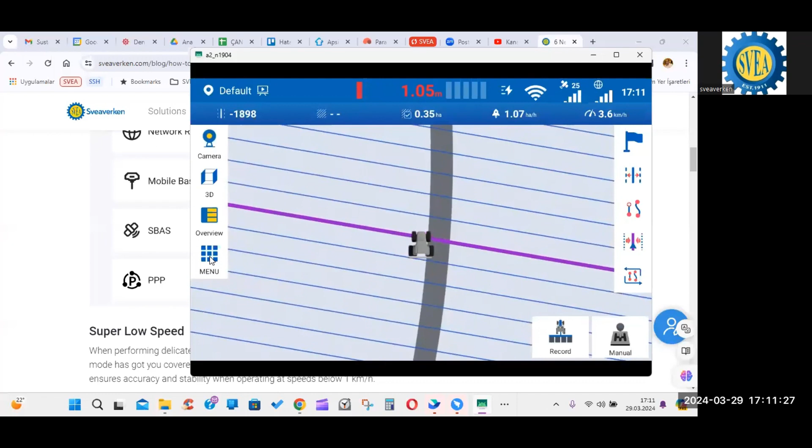And you all know where to connect. We will use the correction source. In our system, you press on the menu, device settings, and the correction source. Since my device has the L1 board, you need to have an L3 board to see the SBAS and the PPP signal. If you have that, or your customers and clients, you're going to see this direct signal.

Some countries are very sensitive to the price of RTK, and rough tasks may be done with PPP—land preparation and spraying, spreading, such kinds of tasks. Now the second one is the one we worked a lot on, actually. Now we call it the super low speed function.

With the help of this function, we can reach down to a 0.1 kilometer per hour limit. This is especially useful for planting trees or crops.

So if we would like to understand the limits under 1 kilometer per hour down to 0.1 kilometer per hour, we need to use super low speed mode. We have to activate or enable that function. Normally about 1 to 18 kilometers per hour, we call it normal mode. More than 18 kilometers, now we have a high speed mode with up to 26 kilometers per hour.

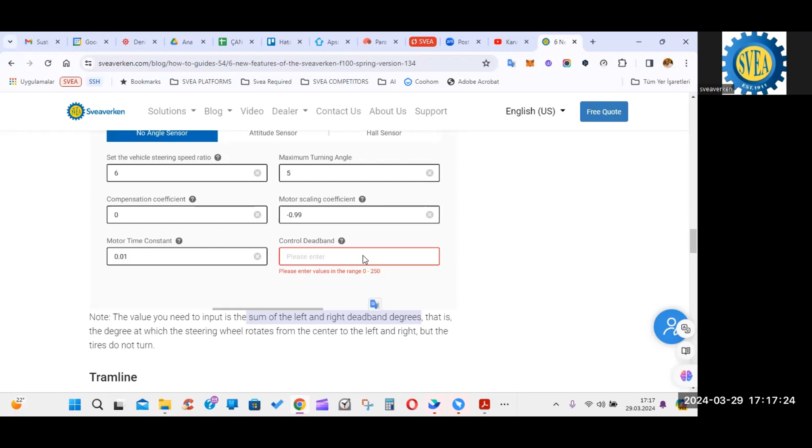Let me show you the place again. When we go to angle sensor calibration, if you choose no angle sensor, you're going to see this one here. The definition or explanation is given in this question mark icon.

No need to remember something. When you measure this, you pull the steering wheel to the left until it stops, then go to the right and measure that from left to right. Is that okay? Exactly, yes. Okay, perfect.

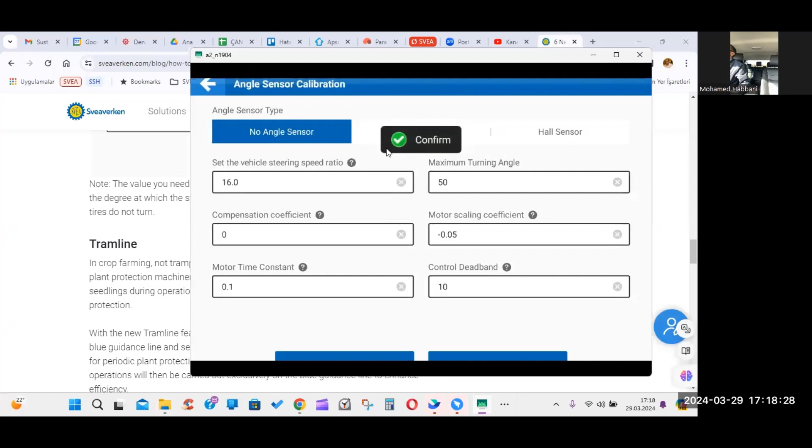You said it's only with no angle sensor. Do you mean it's automatically compensated when you use the attitude sensor? Yeah, actually from the logic, no need for this version, the attitude sensor automatically compensates itself. Since with this version, the no angle sensor mode also will satisfy our users, farmers, as I explained, no need to use angle sensor because of the calculation methodology. We have changed most things, and suddenly the accuracy is getting better and better immediately.

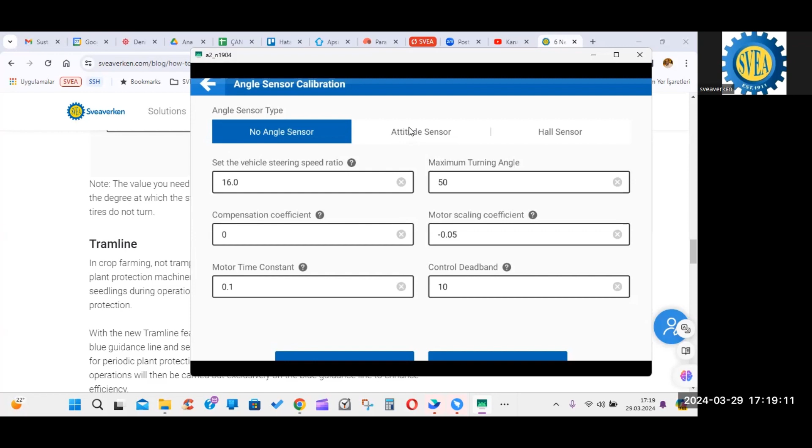So that means if you choose this one, no hesitation, the dead band issue is no longer valid here.

Because I have one on the self-propelled slurry applicator, and he is not reacting quite good because of the dead point in the middle. But he is using attitude sensor. Is it the final version you mean? With the spring version or the standard version? No, the 316 version. Yeah, actually we first should upgrade that one to this one, and you'll see the difference. Okay, clear, you'll be happy.

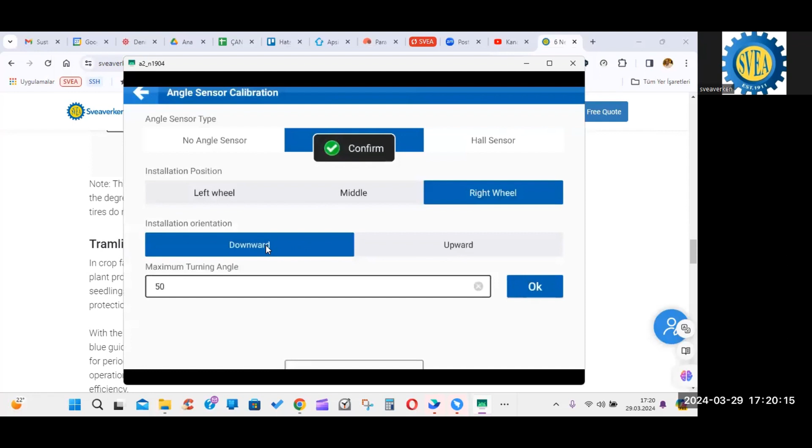I see also installation orientation. Does that mean we can put the sensor now upside down? Yes, exactly. With this one, if you put the attitude sensor from this version on, you can switch or install the angle sensor upside down or downward position too.

Good to hear such reactions, actually. So all of you needed some of these features for a long time.

Now we can come to the next feature, tramline. Especially for plant protection, for sprayers, since their booms are so wide, they need exactly the specific rows to match the seeding rows, let's say, or the guidance lines. So here we have a very flexible feature now. We can set the tramline function depending on the width of the implement and giving the row number. We are going to check it together now.

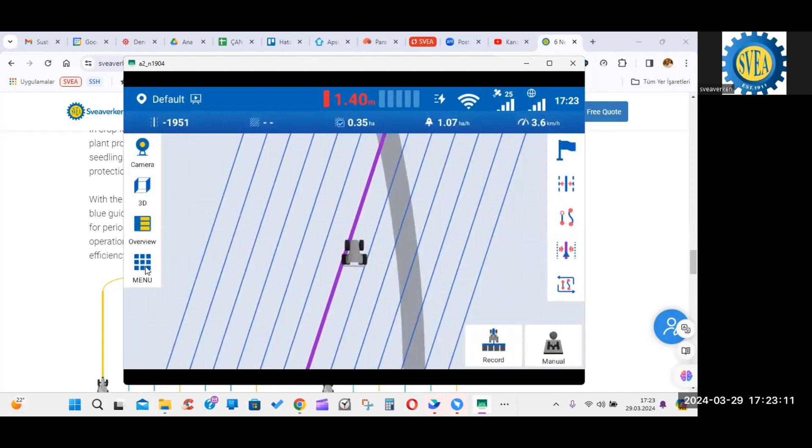Right, you can see the normal guidance line here. Whenever you create a new guidance line, there is a guidance line name, so you're going to find these lines on the field management here. So the guidance line, you see on the right-hand side on the tablet.

There is a tramline function. If you activate or turn on this function, now this guidance line can be used for tramline or sprayers, okay? So there's another explanation here.

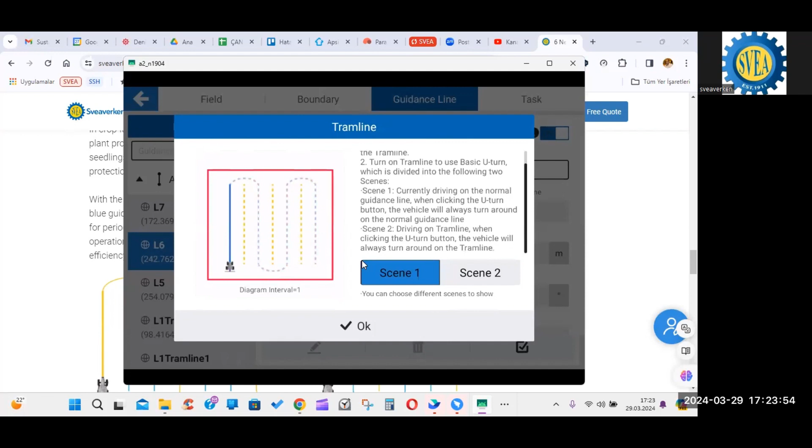For the blue line and the yellow line, they are different from each other. So if you choose one, as you see, the blue one is the normal guidance line, but the yellow one is the tram line. You can follow this one.

All right, understood. After activating the tramline function, you are going to see another icon on the right-hand side, just above the selection point, this one. You see?

When we press on that, it asks if we are going to use the current guidance line as a tram line, okay? But on the other hand, let me explain one more thing in the field management side.

You need to decide what is the interval. Second, third, normal guidance line, and then a tram line. The fourth one, every fourth line is a tram line, okay, here.

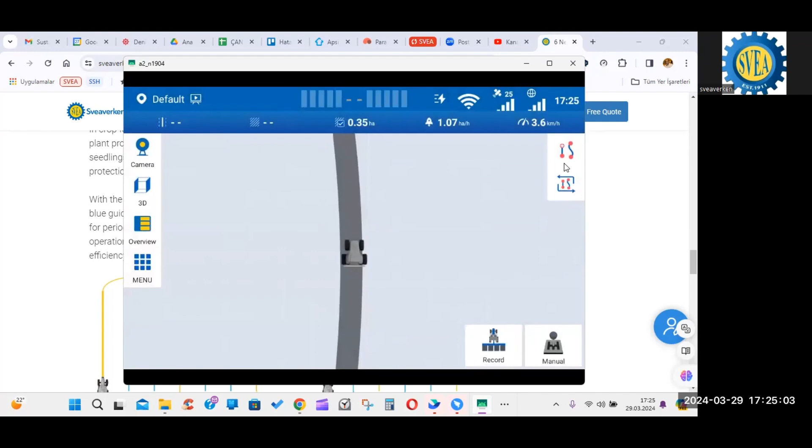When we go back to the screen again, we are going to select this one and we have the function. If this is not a tramline activated guidance line, you cannot see this icon here, okay? So here, if we choose yes or okay...

Then, as you see, every fourth line has a different color, the yellow one. That's great, really good. Very happy with it. Now let me turn my steering here.

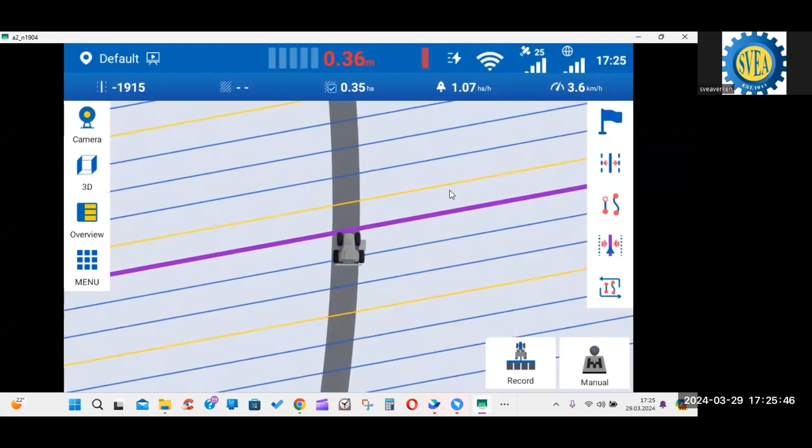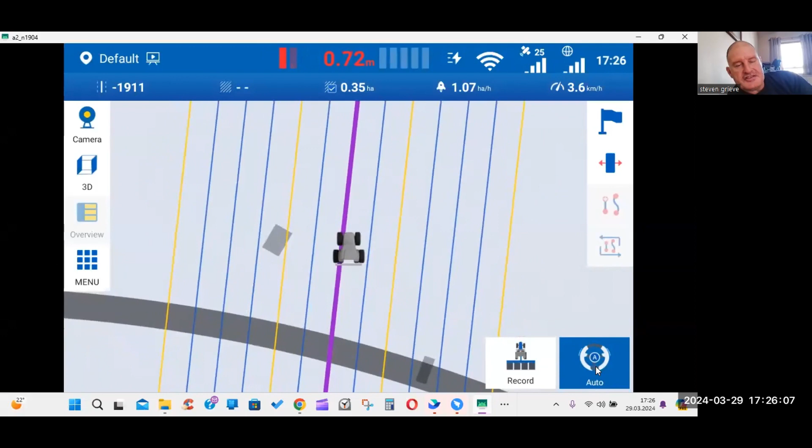So if you were going to interpret that from, say, a 3-meter setup, if you were on an 18-meter tram line, you would take every sixth one as your line. Exactly, every sixth line is the tram line. That's right. Okay, now I activated my steering wheel motor.

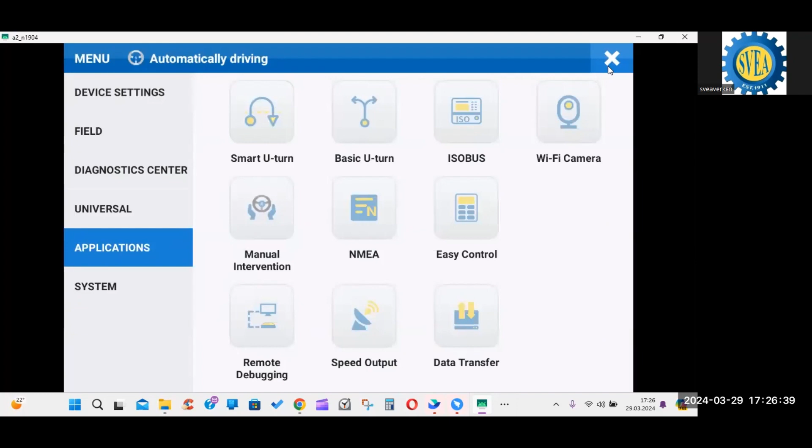Okay, of course, first of all we are going to use the basic U-turn. If we press the headland marking, flag 1 here, and I would like to, of course, I need to stop the auto mode first. It goes forward. I want to use my basic U-turn on this.

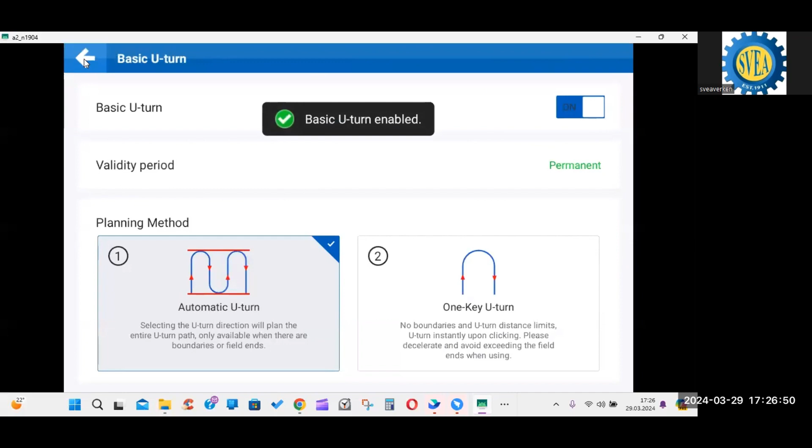That's why I'm using or activating, enabling this one. And after that, I want to put the second flag or the other one. And let me turn, hoping that it's not so close to each other, the headland marking, I mean.

Okay, so now I'm on a normal guidance line. As you see, the basic U-turn arrows appeared.

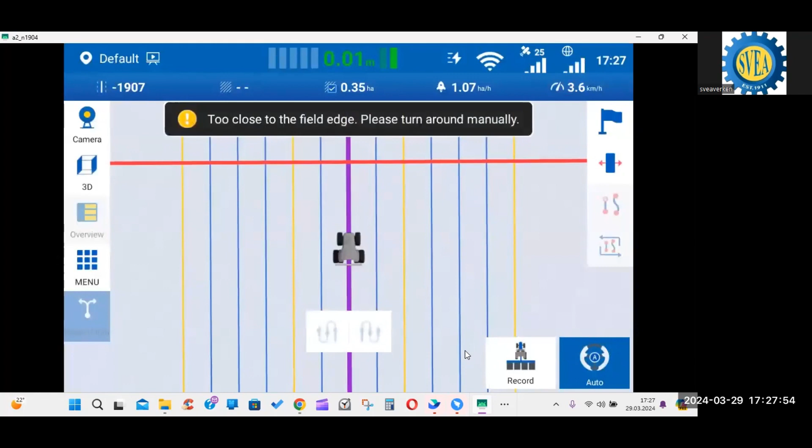Since I'm very close to the headland area, let me turn one more time. It deactivated itself because it's so close.

As you remember, it's not easy to use the demo mode for this, so immediately I'm going to show you this one. A new drawing for the turning appeared here.

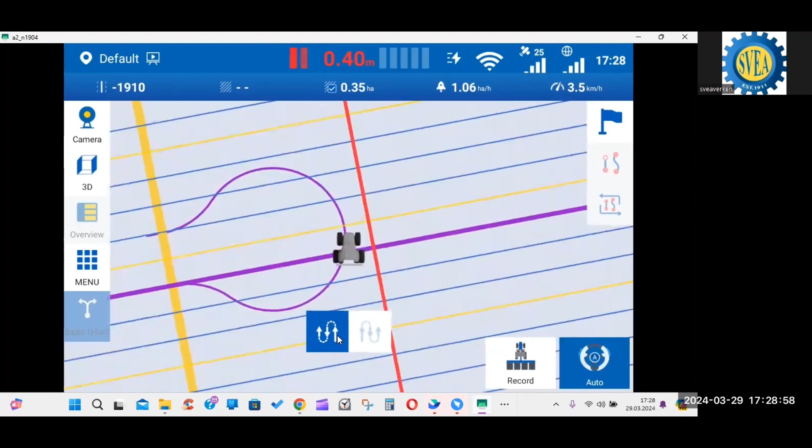But please watch carefully that the tractor will turn not on the tram line, not the next row, but the second row, if there is an adjacent tram line available.

So you would need to have a double tramline headland for that to work. You would need a double tramline headland for that to work.

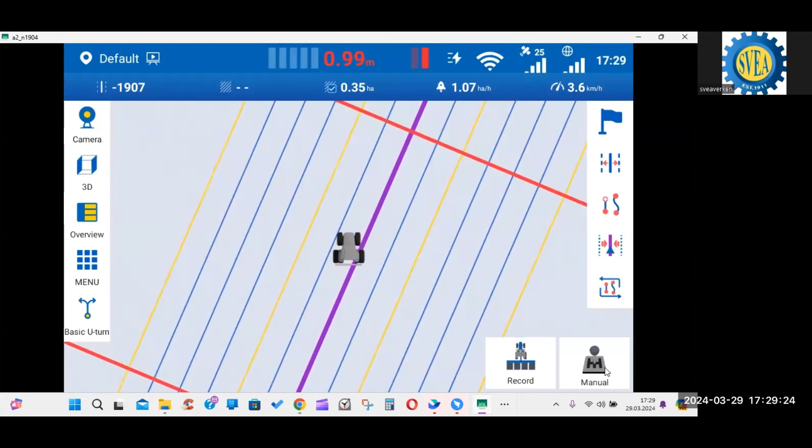So if we are, for instance, if we choose the tram line, of course we are going to turn back because the field is so close to each other, the headlands, I mean.

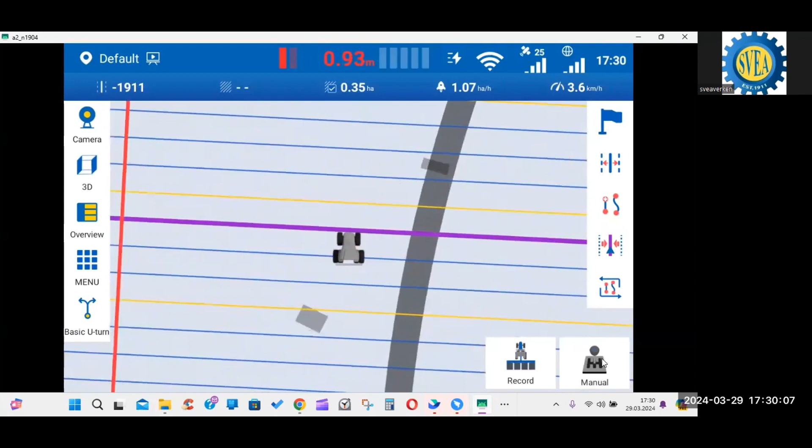So I'm going to show you how to turn on a tram line here. And the tram line is now bold and saying that it turns within 20.

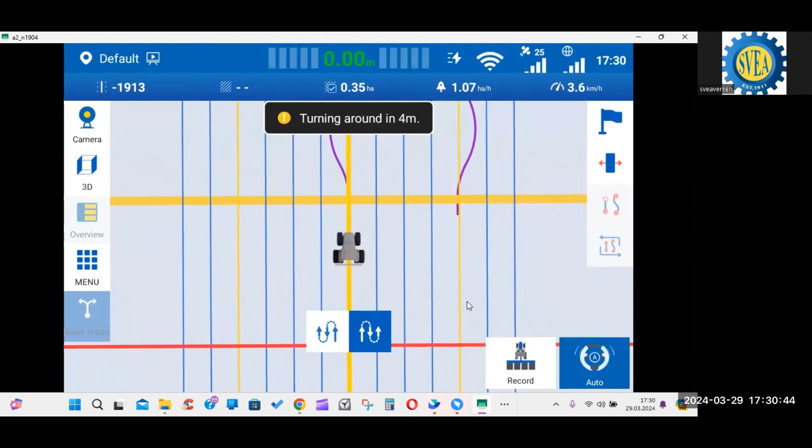As you see, the U-turn, the basic U-turn, calculated the next tram line. So that means, as a summary, we can use the basic U-turn function for tram lines too.

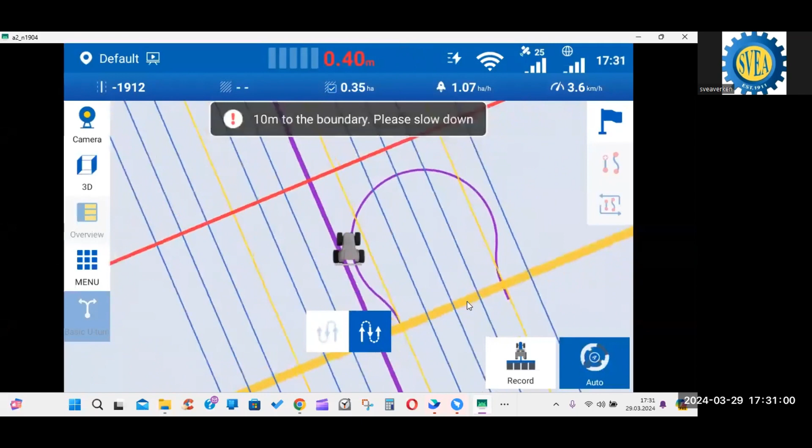As Steven said, every fourth, fifth, or sixth line, depending on your seeder width and sprayer width, when you select a guidance line, a normal one or a tram line, will define what the next turning row is.

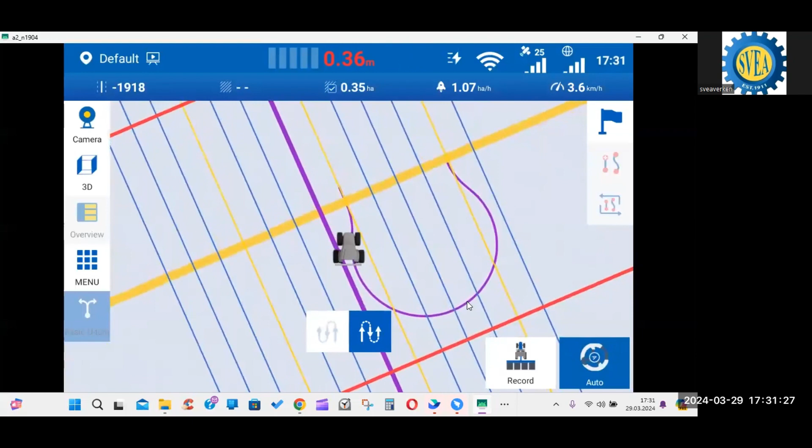Is it clear for the default tramline function now? Or do you have any questions here?

I have a question about the flags, Dinser. Was it already the field border? I thought in the past it was a line in the field. Yeah, actually, this is the headland marking, for the purpose of this one, headland marking. So if you are in basic device, not an advanced one.

Oh, so okay, yeah. So you can purchase separately the basic U-turn functionality as well. And with the help of these functions, you can set these two flags as headland marks. Between the two markings, you can use basic U-turn too. Yeah, okay, that's clear.

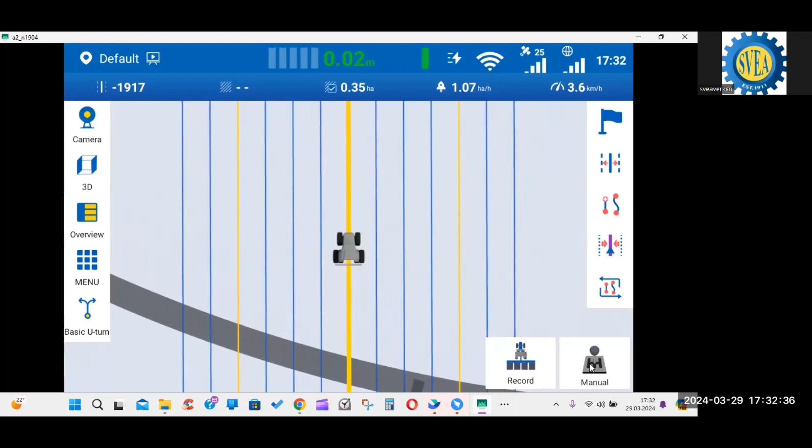Okay, if it is clear, I think we have a good new feature everybody has been waiting for. Now we will have it. Good, good. Yes, that's great.

Now, another one. Actually, these features are very trendy, or when we compare with other brands, especially premium brands like Trimble, everybody has been asking for the parallel guidance line to the border. So now in advanced mode only, because we need a border - the border function is in advanced mode only - we have the headland guidance line in this new spring version, okay?

In that way, we have two types of creating this one. Either we can create parallel to all borders, or on the right, you can see we can choose any line of the border. It really doesn't matter if it is straight or curved.

So let me show you a little bit vividly here. We are going to now activate the headland and diagonal harrowing under automatic driving settings, the bottom here. So that means these functions can be visible or invisible if you set it on or off, depending on that.

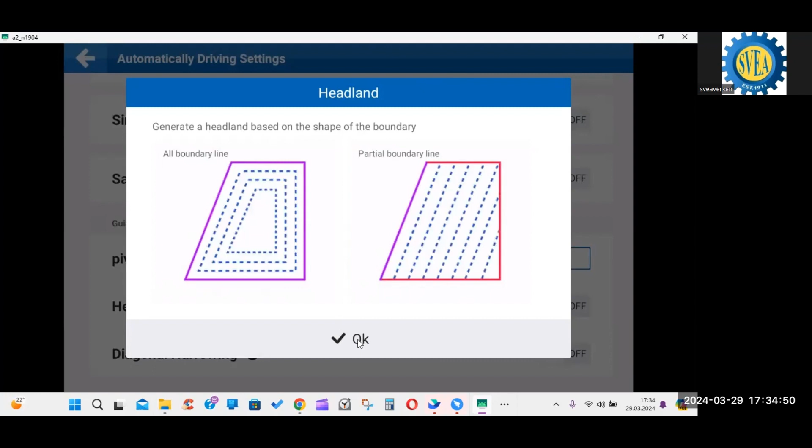So if you set it on, like diagonal harrowing, when you open these functions and features, you are going to see two new icons under the guidance line.

So this is the headland. When we press on that, the system asks us for a boundary importation, okay?

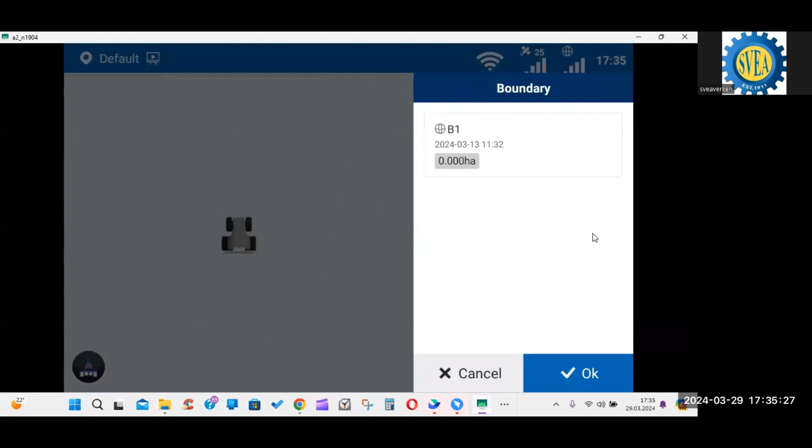Then, of course, it was somewhere else. Then it creates the guidance line, boundary lines inside that. In order to do that, it's showing us the type as it was here.

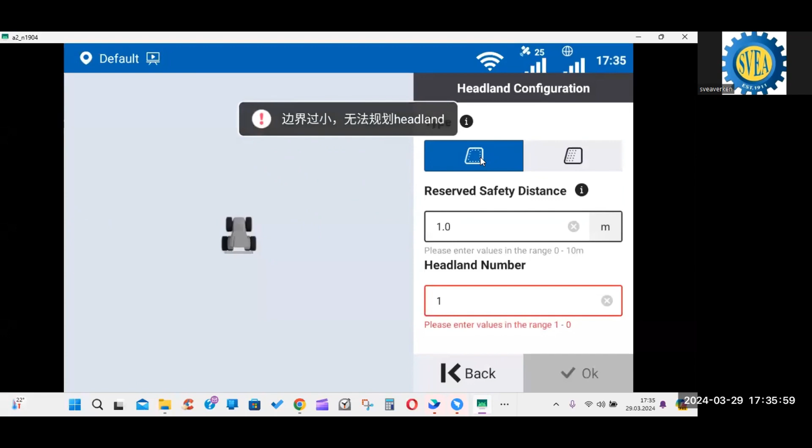Either we can choose the sides of boundaries or use the whole boundary. And the headland number is the number we would like to create. Most of the time, I think, at most 3, depending on the country again.

So there's another one, the reserved safety distance. There was such a feature, now it's more visual what it is. The red flashing area is the reserved safety distance. So you can set it 0, 5 meters, 10 meters, 1 meter, depends on you. But the range is between 0 and 10.

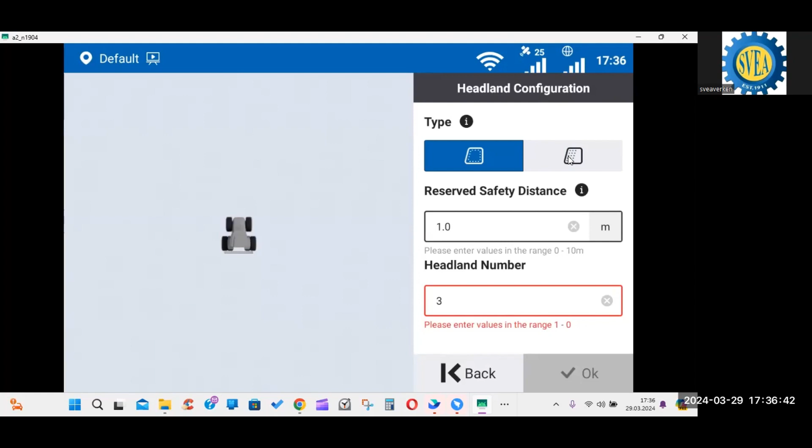So if we choose this one, it will ask us which part of the boundary will be chosen. Either we can go back or select reverse, because it's not a good drawing now. But at that moment, the parallel headland is created according to that chosen side. If we choose it, it says reselect. How is that?

Okay, how's your comment on this new function? Love it. Yeah, love it. It's great, and it's exactly what our farmers want, so that's fantastic.

Just one question to be clear for me. When you take the boundary, it means it's a boundary that you have created in the first place, right? Yes, actually you cannot see it because it's in demo. It's always moving somewhere else.

Right, it was in the past. It's not seen. Okay, yeah, sorry, visually I cannot show you because it's not real, I'm not standing still, my tractor is moving around.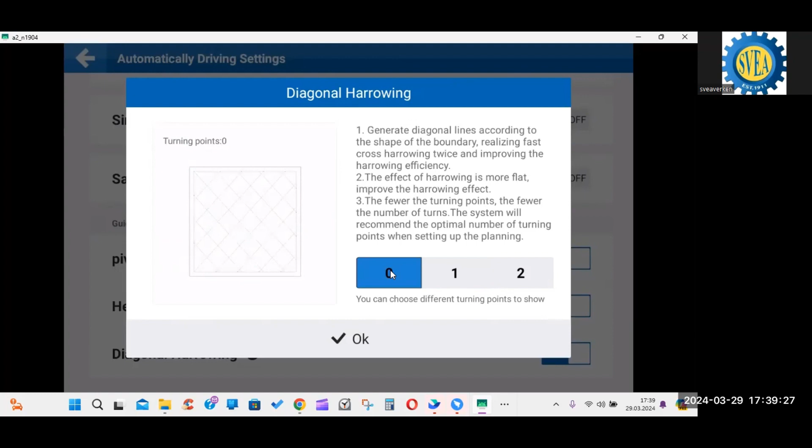The system gives us the opportunity to select between these turning points: either a shallow but narrow and long one, or a little bit bigger one, or if it's something like a square, there is no turning point, it says zero.

So when you choose this one again within a border, you have the diagonal lines, so you can turn it automatically with this function. It's not actually given in our diagonal harrowing function. Evelyn, if you can take a note, we can add it to our web page.

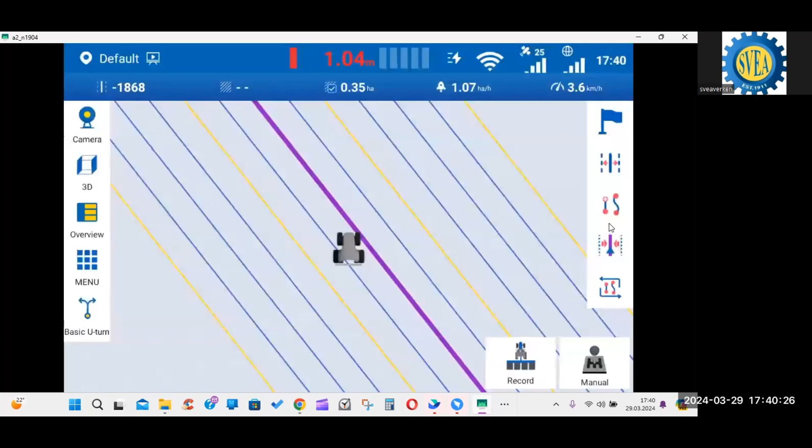If we close all these, including pivot mode, if you don't use it, no need to mess around. As you see, there is no pivot, no diagonal harrowing, or the headland guidance line icon. So in order to use it, you need to activate it. I think it's clear.

If you don't have any questions, I'm going to go to the final one, it's the isobus. For the time being, with this version, we have released the UT or VT function. That means if your implement is a comparably old one, no need to use their own specific screens, they can use our shared screen.

Let me introduce this one. Under the application menu, we have the isobus. When we activate this, first we need to open or enable the performance mode, because there is too much data transmission between implement ECUs and our screen. We have basically two functions here at the moment: the VT function is now available, and TC function needs advanced mode.

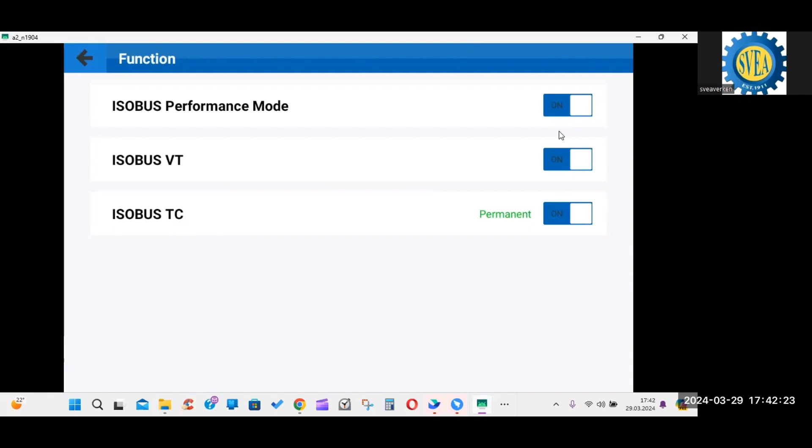But this is subject to sales, they are going to discuss how we are going to release this one. When we open or enable all of these functions, we are going to see another icon on the left-hand side under the basic U-turn icon. When we press on the isobus icon, we see a task controller section on the bottom and the virtual terminal on the top right part.

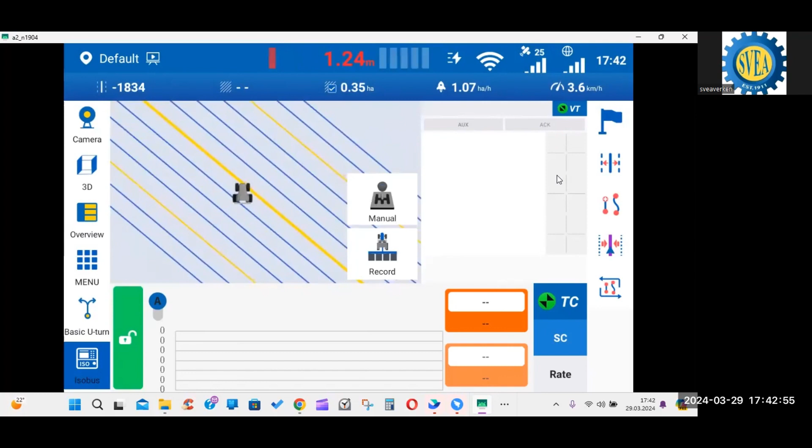When you press the zoom in, zoom out, the green and black arrow areas, one enlarges, the other shrinks. So this is the one when we connect an isobus implement here, our screen divides or splits into two. On the left-hand side, for instance, we can use such a screen and record manually. On the right-hand side, we have the virtual terminal or universal terminal.

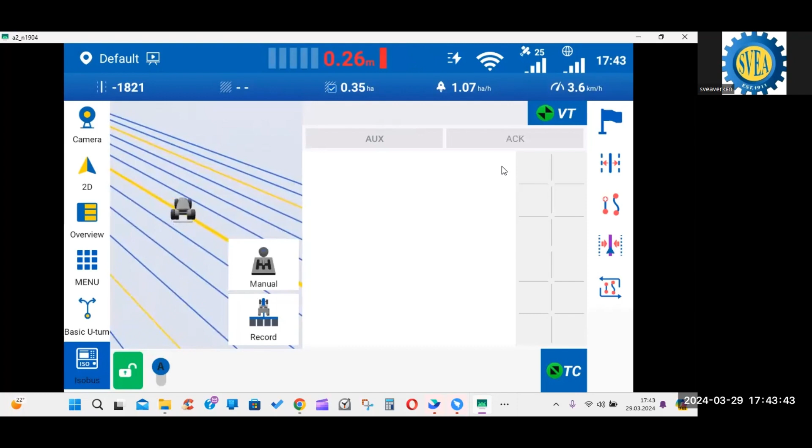Depending on the implement features, there will be a loading time. The first time loading of the implement's ECU may take longer, but after that the connection time is comparably less. We call it the object pool area, so every function of the implement will be shown here.

But at the moment, on the Android side, the communication is not the true one. That's why we have to upgrade not only the software but the firmware as well. We are going to guide you during the upgrading, so just keep in mind that firmware is also important at the moment with this version if we are going to use isobus functions.

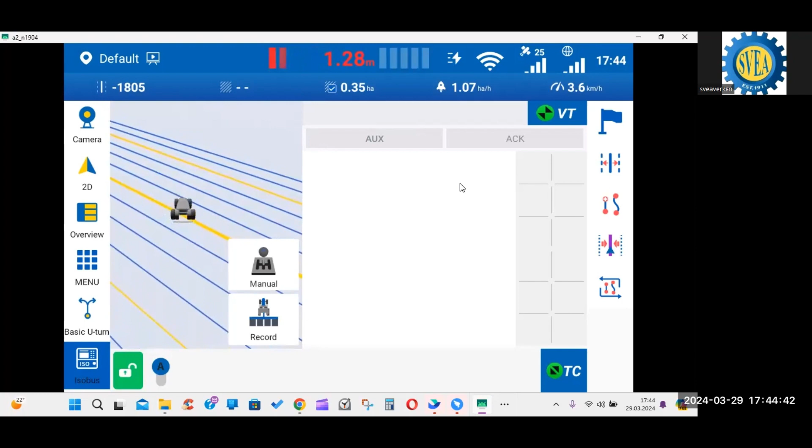I'm not going into details of the VT, but just a brief note about section control or rate control under the TC function. The section control is the automatic switching on and off of the valves. The rate control depends on the geographical location, actually, and of course section control uses that too.

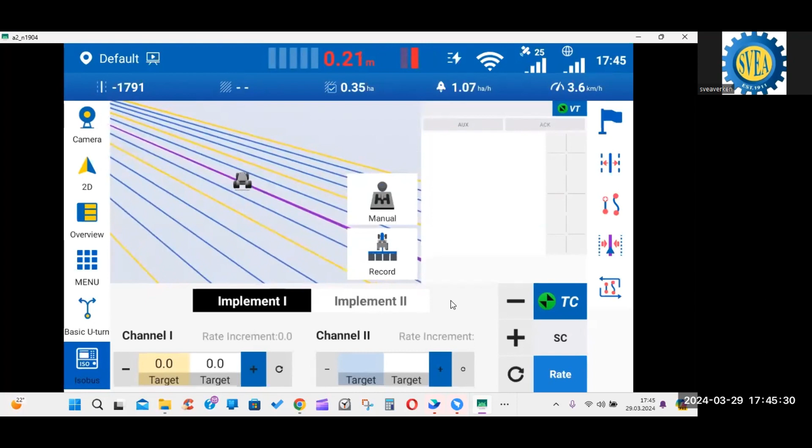On the right-hand side, there are materials on channels, and you can increase or decrease manually as well. There will even be a second implement for that, and this function can be used in manual or automatic mode. You can lock it so nothing changes, or you can open it. This is standard, just how it's shown is a little different.

What are your experiences about isobus? What have you done so far, actually? We have some ECU connection, not a problem. At the moment we are discussing the TC function mostly. Do you have any experience, Mike, have you tried that, if you are here still?

Yes, I'm here. Yes, we tried several things: one was a 12-row sugar beet seeder, the second was an Amazone spreader, and one customer is also using a Kverneland spreader. The installation was easy and works fine, but we had some problems loading the ECU the first time, it took a little longer than expected.

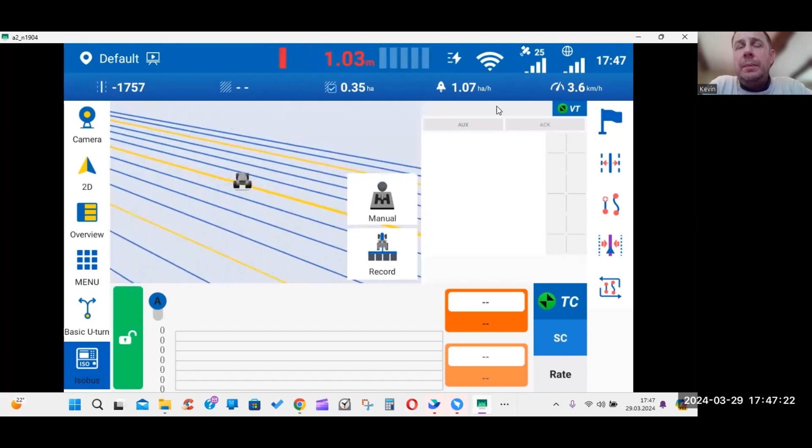Yes, we will see how it works. It's too early to say hard facts, but it's upcoming in the next weeks. You have been dealing a lot with that, and I know Kevin also tried it. We tried the TC version on the Kverneland spreader. It worked fine, except the UT was not very stable.

Since then, that's why it's in the beta. We are going to release the final version for that.

The official one, I mean. So as you know, we distributed the hardware for the ISOBUS connectivity, and now the sales team are going to distribute the second part, or batch. I think Peranen already ordered.

Has anyone not ordered yet? Any ISOBUS hardware harness? Not yet? If you don't, you may connect with the sales team, with Evelyn for instance, just to be ready before the first demand. You can add it, it's so cheap, it's a cheap product.

Do we have an AEF certification, need it or not? Actually, as you know, the sister company has already registered for the UT at the end of last year, and last week they already finished the TC function. Now, as a Sveaverken brand, we are going to start with the AEF certification.

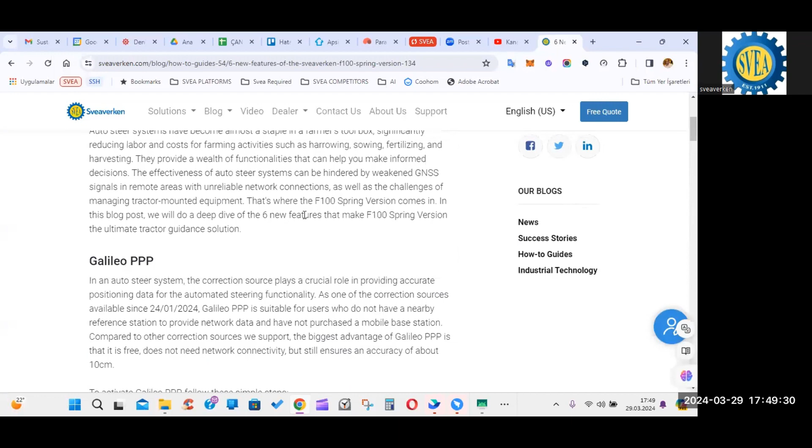But basically this ISOBUS functionality has already been approved, and we have started to use it. For the new ones, the most demanding features are those. But on the other hand, we have many more improvements, especially for the visualization and optimization issues. Here, maybe you are going to use this one also.

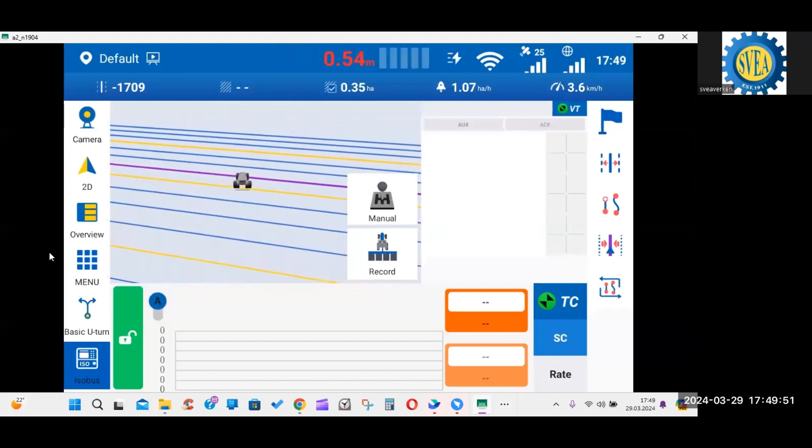Under the menu and diagnostic center, we can see the GNSS tracking map here. If you have the L3 board, I mean the SBAS PPP, you have another direct satellite signal. You can easily see how many satellites are available, used and not used on the left-right side. There are also QZSS and IRNSS which we are not using most of the time. There is one missing part, which is the SBAS augmented direct signal for SBAS and PPP here.

So we have this print, but under that you can see a list. There is a lot of sub-information, not only the one chart. Later in the real data, you are going to see what it is, and you'll have the chance to compare within time.

Sorry to interrupt. For the Galileo PPP that you described at the beginning, so it's a new source of correction that is free, if I understood well. Is there anything we need to connect on our screen to get to it? No, nothing. I cannot show you here, but it's a piece of cake. You're just going to select the Galileo. That's it.

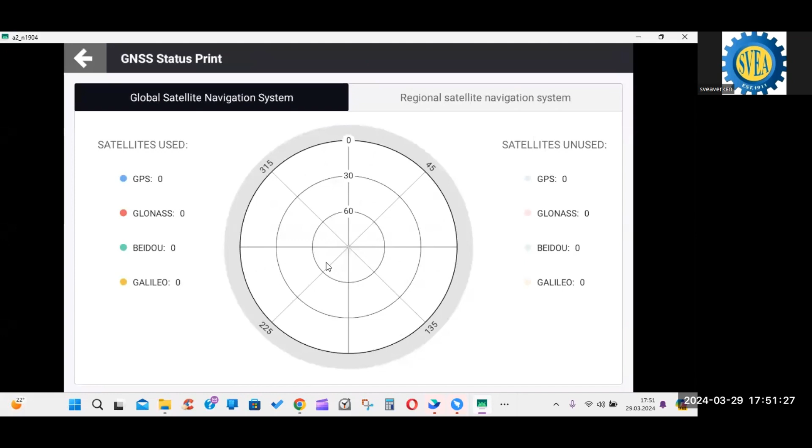It is something like this. When you go to correction source here, I'm going to show you like an RTK. You see, pressed, you'll see the Galileo PPP here. That's it, and it will not be under RTK. It will be under... of course there will be another direct, SBAS and PPP together. It will be like that actually, you see here. Excellent, it will be like this.

On the other hand, as you see, diagnostic center has been transferred to the left menu here. And we have called it common SOAP, but it's a troubleshooting manual. Up to this moment, we have been sharing the details when you have some problem. All the FAs have filled this up, and now you and the end user may directly find if there is something wrong in their systems. If it is related to SIM card detection, how to follow up the procedure, what could be the reason, and if there is something wrong with the satellite signal.

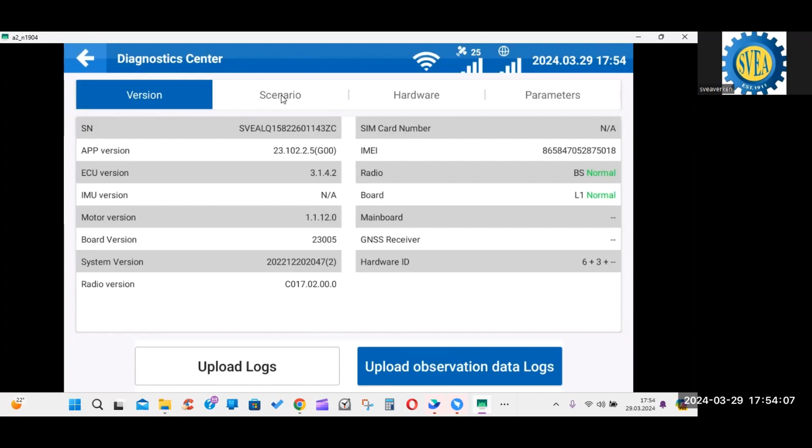What's the scenario here? As Philip asked, baseline distance can be seen here. It's not called RTK status anymore, it's called GNSS status. If it's a network RTK connection, the status is 4, since SBAS has different status numbers, and especially age of differential and the baseline distance are the ones you have to care about. Sometimes, rarely, the system may try to connect to a point more than 30 or 40 kilometers away. If the distance is far, the accuracy will decrease, so we have to check this instead of trying to guess what's wrong.

We can directly check this part, Philip.

The other day I had a customer coming from a very flat area using his tractor with a scraper to level the ground. He was asking me, like John Deere, if we could capture the elevation data and if it was accurate. I see here you have elevation—is that usable in any way or not?

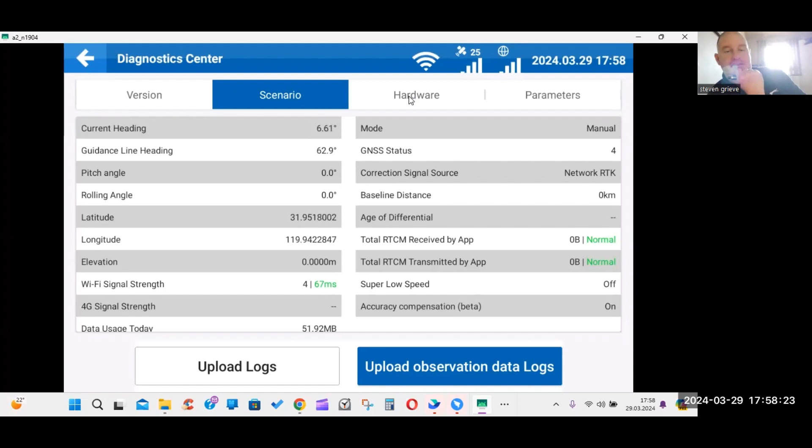Is there any other demand or requirement from other dealers in the market? Yeah, I have an old customer who has a CHC Nav with a grader, and he uses the CHC Nav height on their screen, and that works. So it might be an idea to see if they can bring that in as a usable measurement.

Any other? Well, often we get questions about the hydraulic version and how different it will be from the electric motor version. I don't know if you can say anything, or if it's too early to talk about it. Yeah, it's too early—we haven't been introduced to it yet. They're still improving the product, and there are too many different products in the market as well.

For every different brand, they've been using different types of valves. So, if it's a retrofit kit, they're going to provide us a valve to properly fit the tractor. I think they're going to introduce it in Q3. We'll discuss it later—no rush.

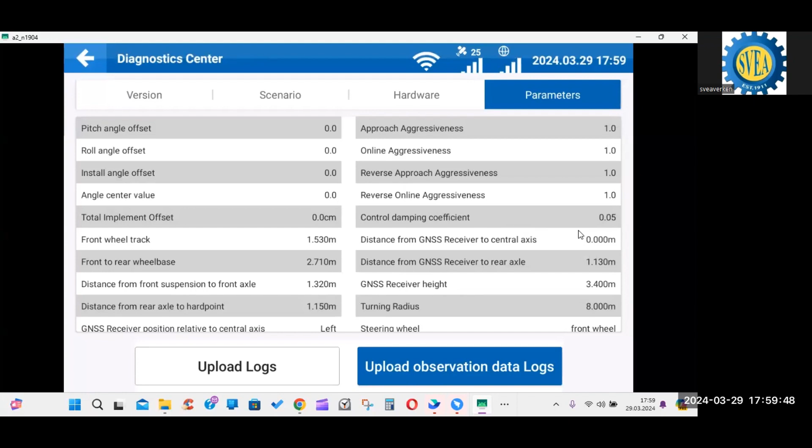Okay, let me continue with the hardware tab here. We can easily understand all the issues when we check these tabs if there's something wrong, but I'd like to give you another detail. In previous versions, we did not have a 3-digit field; now we can enter values at the millimeter level. It used to be centimeter precision, but with this version we have millimeter level—you can see there are 3 digits in the field.

This is especially important for the central axis distance to GNSS antenna, since sometimes it changes by one centimeter to the left or right—so now we have a half-centimeter option.

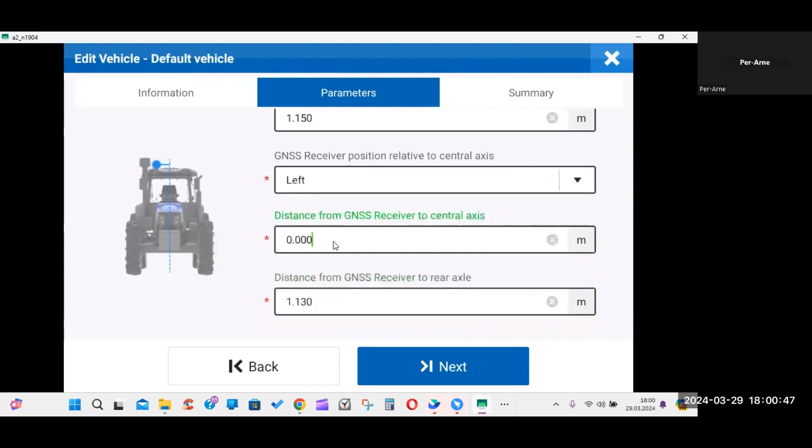Okay, have we plus or minus in the front? We have left or right on the... No, we have the left or right option. Yeah, there. Okay, yeah, sorry.

So that is another thing. Let me continue from the menus here.

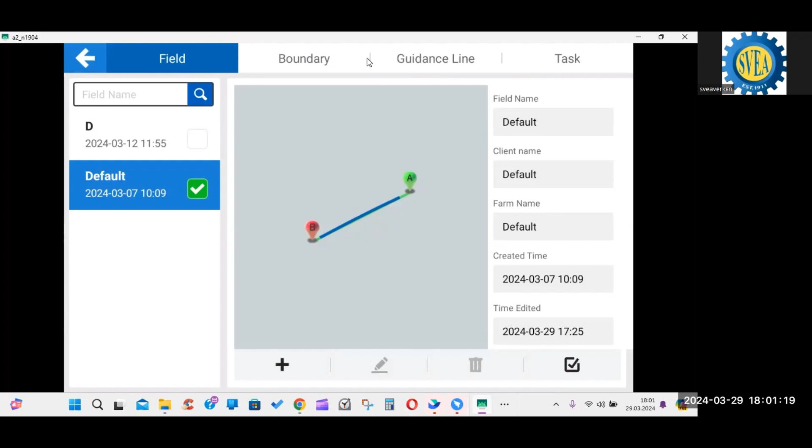Actually, in field management, we have the search bar for every field boundary, guidance line, and tasks too. And you can see the field name when you switch to other tabs. You can still see the farm name or field name here.

Also, as you see, batch delete is also possible now instead of deleting one by one.

Yes, one question from my end, and maybe it's also available on 3.1.6. How do you paste or connect together a straight line with a curved line, for example?

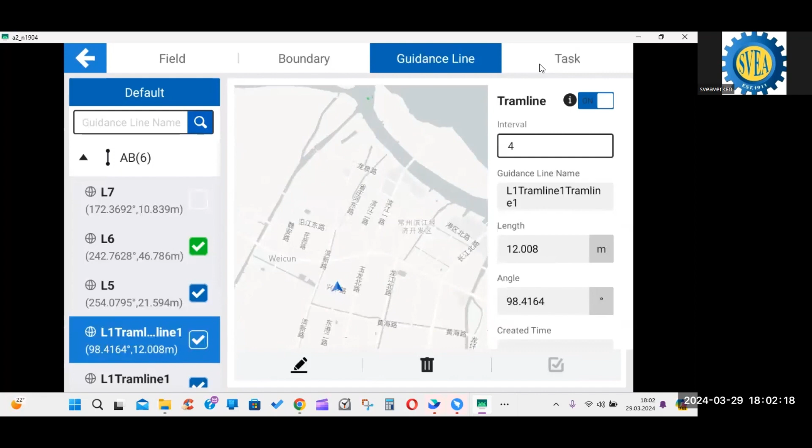Okay, good. Yes, that is actually a line group function. If you don't have a straight or continuity in the lines, instead of creating one by one, you can use our conversion from task to guidance line function. You can see this one here.

So if you create a task manually and record it, for irregular shapes, then after recording the task, you need to convert this path or task into a line. But if you want to draw by yourself, you cannot do it in this terminal, you need to refer to the farm management system.

Yeah, but I know to do the recording where you record and then convert into a line. But that's what we are using in the vineyards, for example. What I want to use here is one straight line that we have done already, paste it and connect it to a curve line that is basically the end of the field. So one is super straight, one is not straight, and I want that to be one group of line.

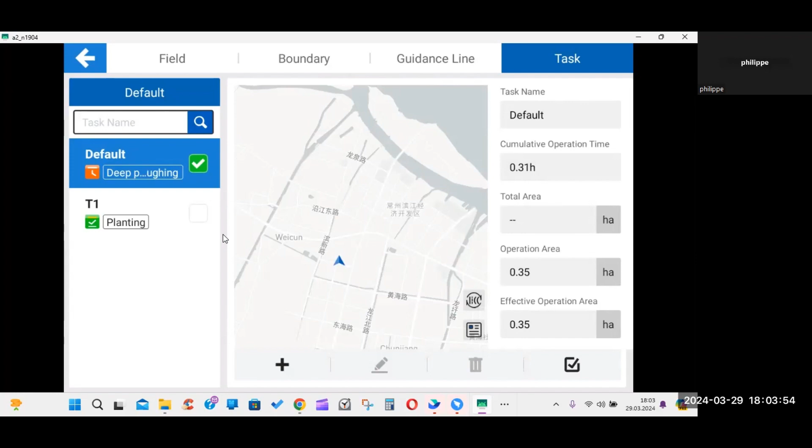Is that feasible? Well, we cannot do it on the terminal side. In reality, people are creating these drawings depending on the coordinates, out of the terminal or any other software, and then importing the line groups. So we cannot automatically create an AB straight line and then add some curve on it. We don't have such a function yet.

So, Dinzer, one suggestion - it would be very easy to implement. We also get this question very often. If you set a pause button in the curve recording, we could combine curves and straight lines.

So if we start recording a curve line, we drive away, we set pause, go to straight line, set pause, end, and complete the line with the curve. Between pause 1 and pause 2, we create a straight line. In this way, CNH does solve it.

Okay, very good to hear it. Actually, the pause function is available when you press the record button. Also in curve mode? Yes, that's the missing link - we have it in the border recording, but not in curve recording.

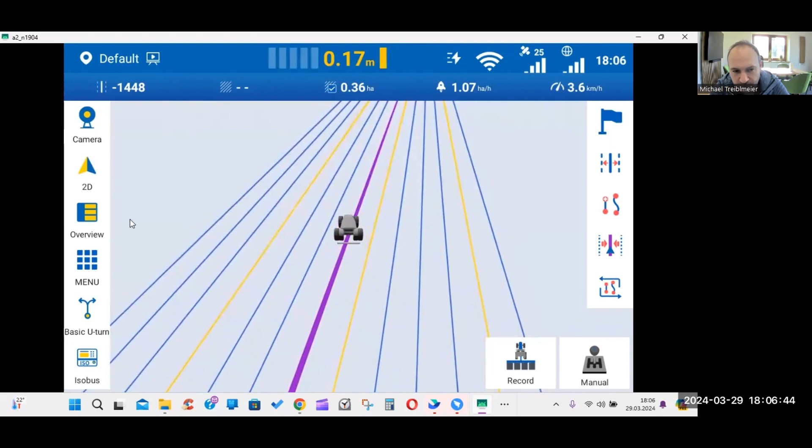So in practice, it's very often the question - we have two straight lines at different angles, which are connected through a curve. So the tractor drives AB, then the curve comes, and then a second AB. We have to create all three lines - the first straight, the curve, and the second straight - into one line we can use for driving.

Okay, it is something like we can have the function here, the red area and the blue area - we can think like that, right? For instance, yes, but it's a very complicated example. So I think it's smooth to connect these two straight lines with a curve. Yeah, you're correct, Vincent, that's what you want to have - a curve and a straight line connected.

Okay, now we have been recording this one and we are going to discuss with Randy. We are going to feed this back and also get your comments later.

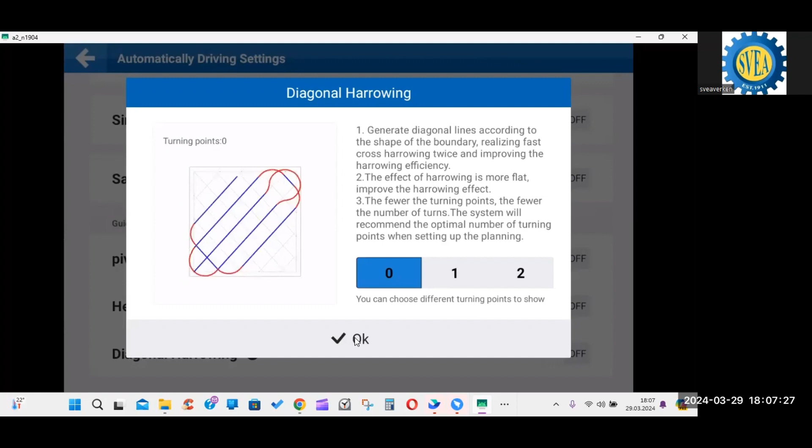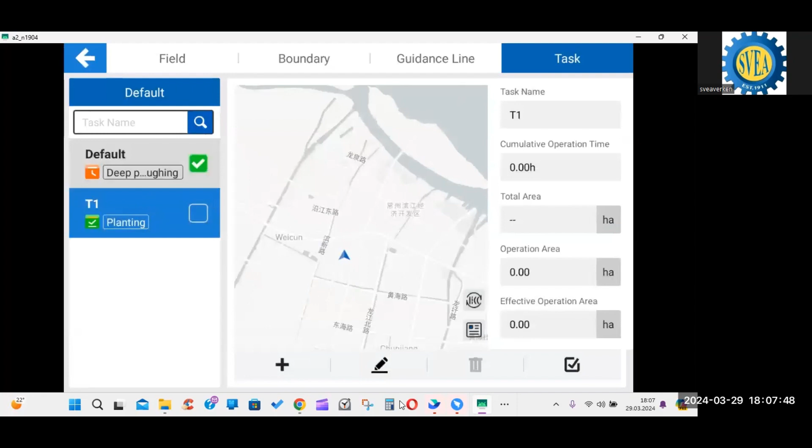What we were going to do is the field management details here. For the task, if you choose one task and press edit, there is a new field called status—either this task can be in progress or completed, and you can save whichever is valid for you. If it is completed, you see a tick. If it is still continuing, you see a clock icon, the orange one. This is new, because if you have many fields, you may need to know what happened in the fields or the task.

We are going to use the system precisely within time. This is another function—we already discussed this. Here I would like to give you one thing.

If you would like to open the tracking map, you can directly press on the satellite icon. Also, if it is a 4G or Wi-Fi connection, if you press on that you'll have a diagnostic screen. That means for the Wi-Fi, if there is some lagging delay on the GSM network or internet network, we can follow up or check the status of the network here.

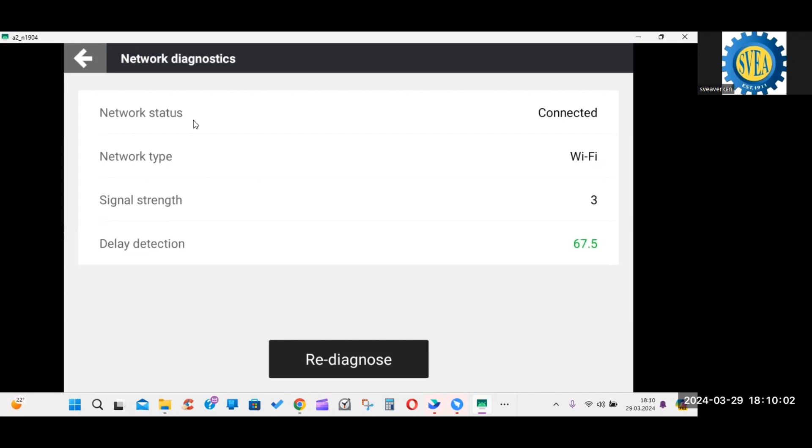Till now we've just been discussing it might be because of that, or it is absolutely because of this. So now we can see this as a green value—it's okay. But if the delay detection value is over 200, it will become red, meaning there might be some delays in the network, and data or accuracy will be affected negatively here. Now it's easy to check that.

Even some countries need to enter the APN values. If I had a SIM card inserted, we can set the APN directly here. It's easier now to enter.

Have you got an automatic search for this function, or well, here in Norway we have some we use.

I couldn't understand, your voice is a little bit low. One more time please, Perane.

This APN address—can you have this in automatic search? Or, I'm yeah, it's searching, right, it's giving you some list I think. Yeah, okay, I remember it like that. Okay thank you, yeah thank you.

Okay, this is another one. The rest is not that functional. In this version we have another option here.

Maybe you realized we can change the installation information, and we can add. Now, if you register the system with a new email, you are the owner of this one. Later you can add new users between specific times, or guests—that means for the managers, not the farmers, can define this type of roles.

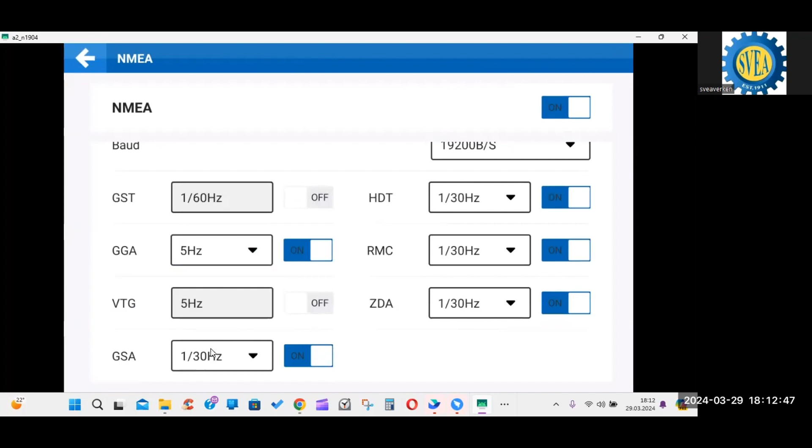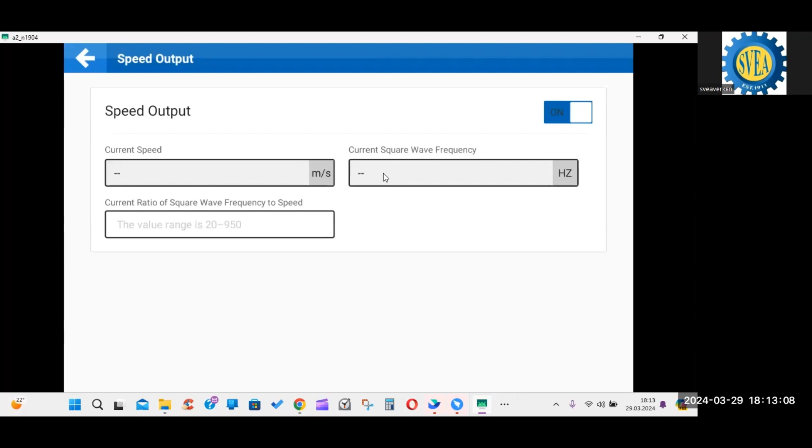This is for the NMEA connection, added as new. We are going to introduce radar speed, but there will be new harness needed for that connection. And this is for the pulse output for the implement side.

And the rest, I think, is okay. In night mode we have a clearer, more visible view—better, how it looks when you look at that. I think it's better now.

On the other hand, we can optimize the speed and especially the positioning of the vehicle—the tractor has been changed. That's why the accuracy is really better with this new version.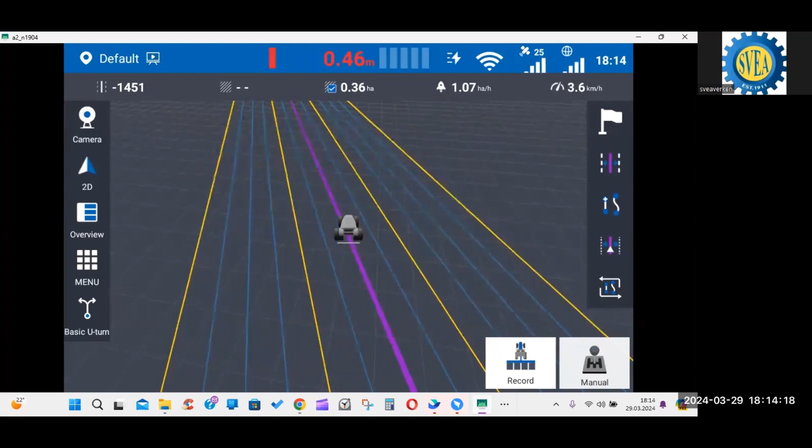And also we can discuss a little bit about the implement library here. You know, we are talking about the skip and overlap—and that is the thing, actually, here.

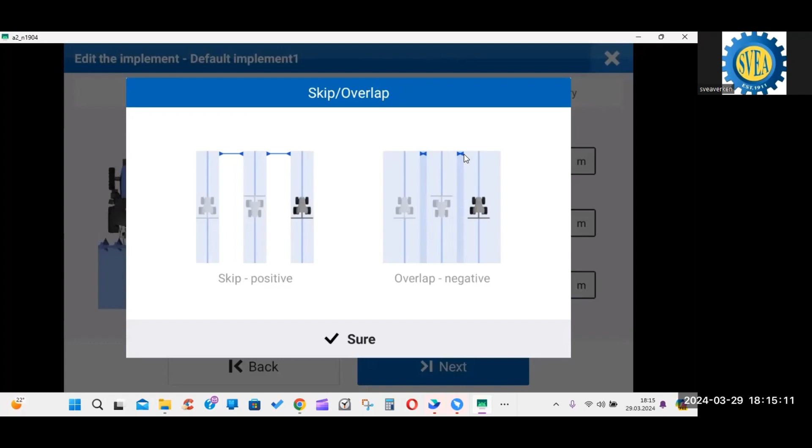I want to show you this area, which is sometimes a little confusing, but now it's easy to understand. If you enter positive values, it means there will be a skip between rows. If you enter negative values in the fields, there will be an overlap. This is explained in the question mark icon here.

From the minus sign in front, you have overlap. With no mark, that means no overlap. Correct.

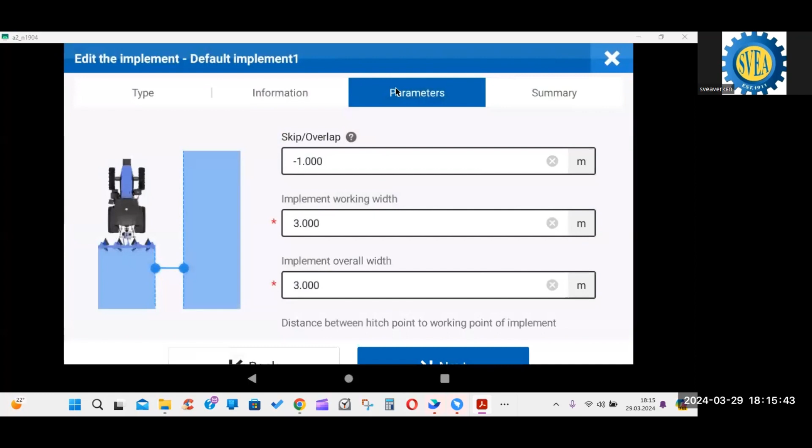I would also like to share the release note for smart U-turn. We optimized the curvature of the turn to reduce the unworked area. Left-hand side is the previous version, right-hand side is the new release. With the U-turn functionality, we have more flexible interactions, and it divides into two, closer to the tractor, and so on.

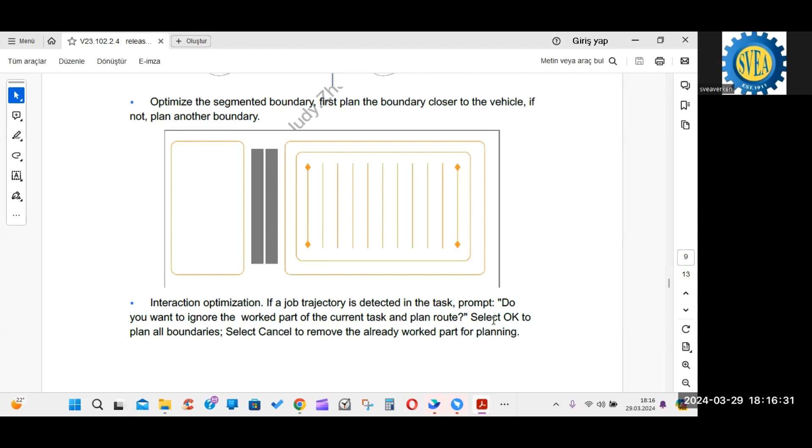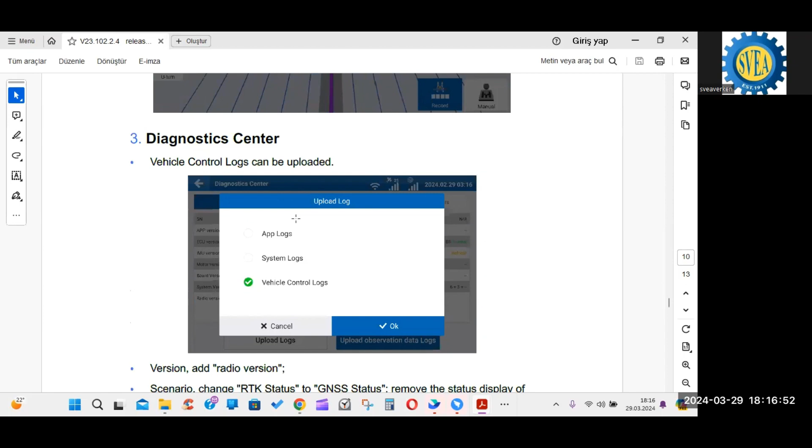Also, if you start a new task, the system will ask the driver if there is a previously unfinished area, whether they want to plan a new route or continue with the previous planning. It asks: do you want to ignore the worked part of the current task and plan new routes? If you say yes, it will clear the current task. If you press cancel, it will continue. In the diagnostic center, we now have more data collected.

That part also gives us the network diagnostic directly in the scenario tab here, shown in milliseconds, green or red, so we can understand it easily.

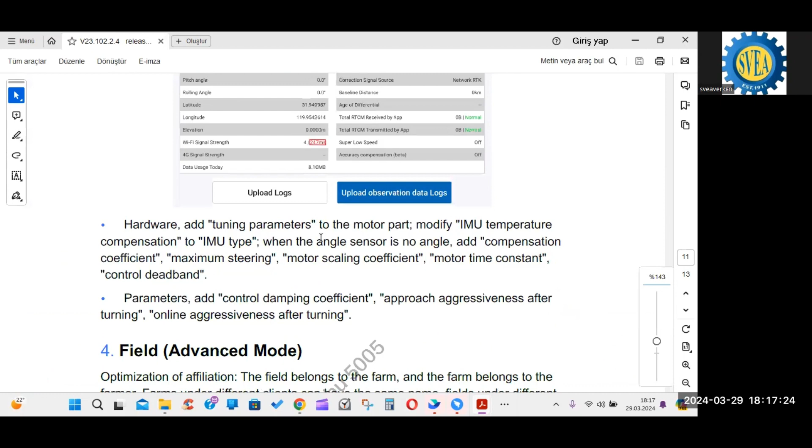Previously there were problems when we created the same client with the same field name and the same boundary name, for instance. Now, if the client has farms, farm 1 and farm 2, they may have the same name for fields, tasks, and boundary names, and there will be no problem. We couldn't previously create the same names across different farms, but now it is possible.

We also improved the synchronization logic. It's optimized now.

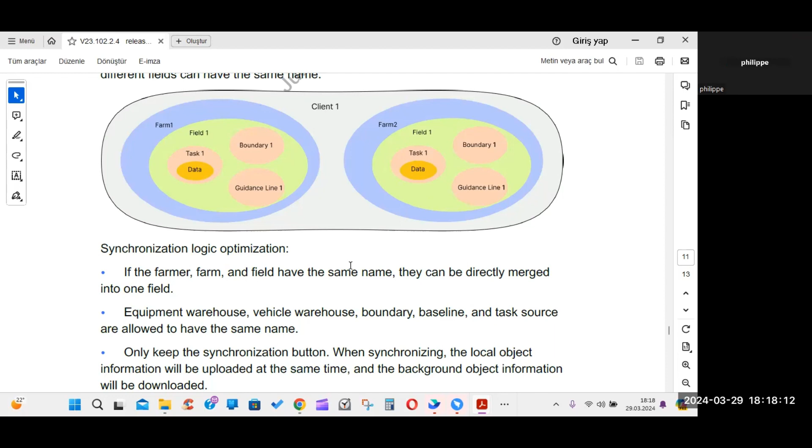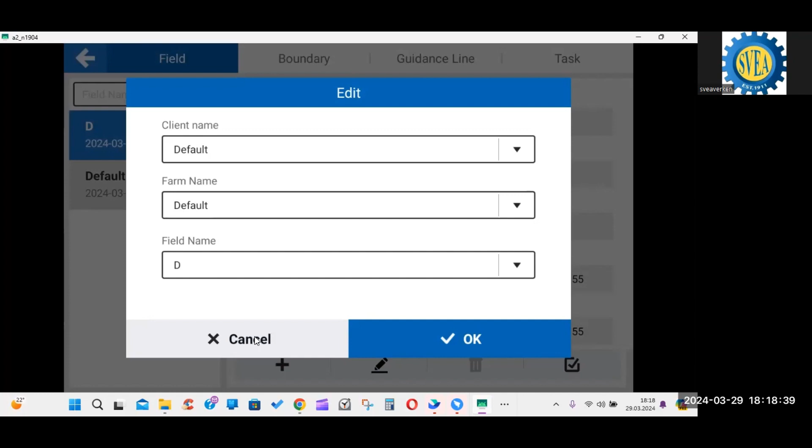Where do you select or create farm 1 and farm 2? When we go to field management, it is stored under field management here. If you choose an item and edit it, you see the client name, farm name, and field name. Those are bound to the farm management system, which is more logical, since the only thing needed on the terminal side is the field.

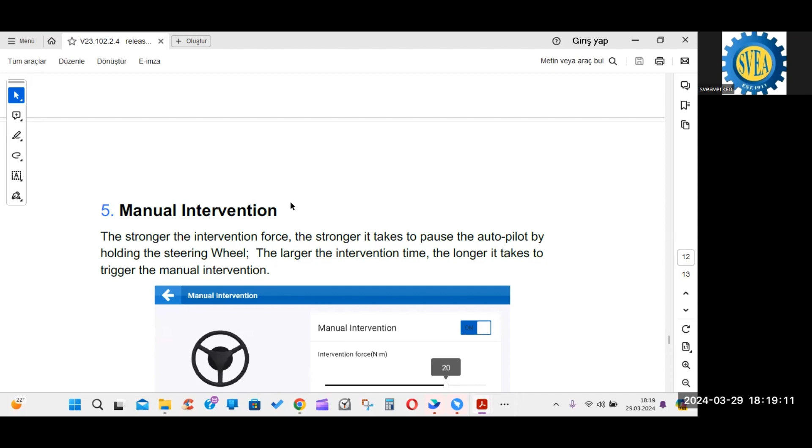We also improved the uploading speeds. And demo mode cannot store anything in the cloud if you create something there. Also, something important was the manual intervention feature.

Let me... was saying. Demo mode, yeah, you cannot use it in demo. Okay, just a second. Closed.

In manual intervention, we now have more functions and availability. In the previous version, we only had sensitivity, but now it's better because it's not activating incorrectly.

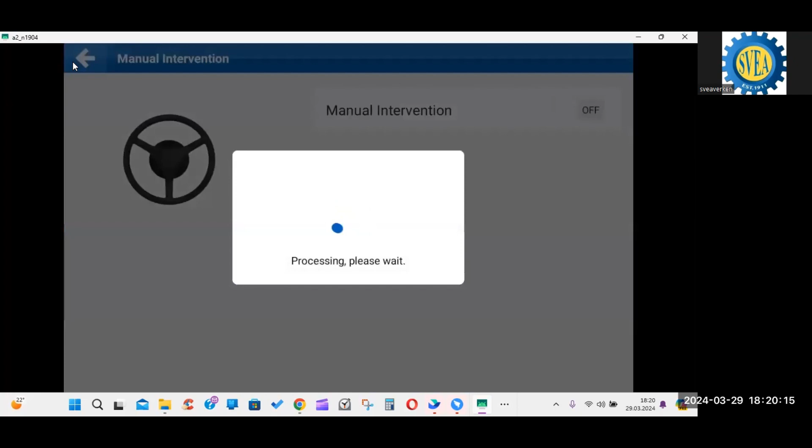Okay, it's not after. If this isn't working, let me show you from this one. Manual mode, Dinser, I always say it's only used for safety reasons, but shouldn't be used at the end of every field. Yes, we haven't discussed that, Philippe, but now we have another approach here.

In the previous version, we only had one sensitivity setting. In this version, we can define the force and the timing separately. Instead of trying to find a single point, we can directly set a time for reacting and switching to manual mode, and how much force is needed. We can define both separately. This is more convenient because before, we couldn't manage it well in two ways - the function would sometimes interrupt auto mode by itself, and if the sensitivity wasn't set correctly, it wasn't easy to stop the system. Now, with these settings, it's easier to set up.

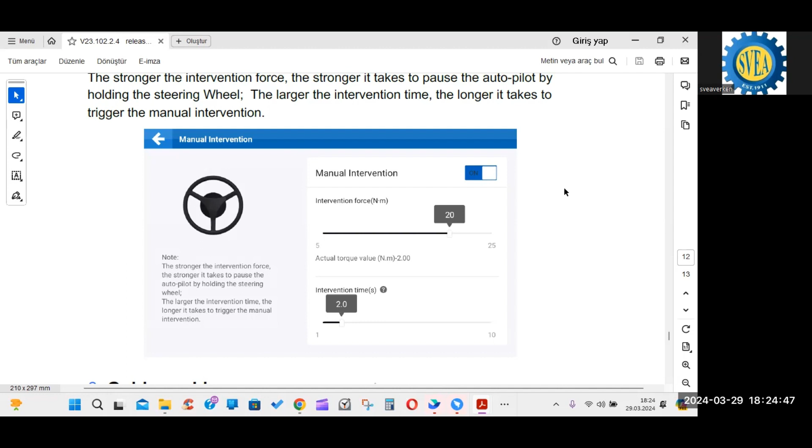So the other thing is the one-line grouping, I already explained all of these things. Data transfer - also if the transferred data is a little bit large, now we are able to transfer this, or compatible shape files. There were different shape files, and we are now ready for more types of shape files. Yes, so we can now upload the line groups. Yes, line groups can also be transferred.

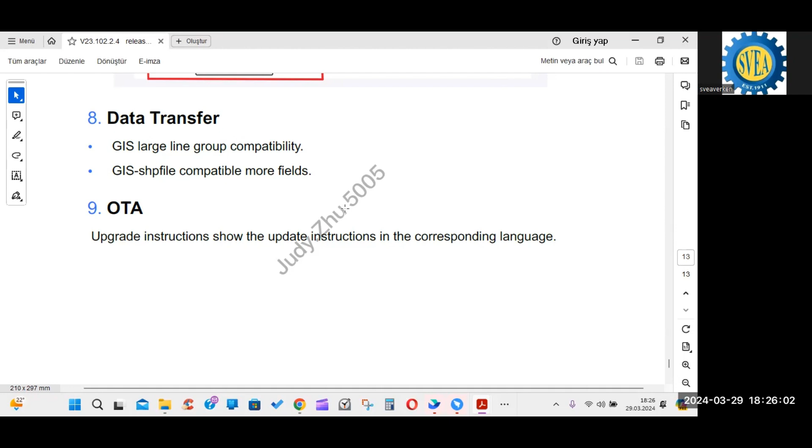Okay, thanks. On the other hand, if there is something different, I'm just checking the notes here. Yes, I think it's okay. We have these features, new features with the new version. Do you have any questions? You may dive in now and we can discuss. No, I think that's it.

I have something to put on your wish list, Dinser. Yes, please. I hear from some customers - it's not a big problem, but they want the correct field, the closest field, on top of the list when they enter an area, so we know where the fields are. When we need to choose the field, it would be easy to have the right field on top of the list. Can we call it automatic field recognition? Yeah, okay, I already gave that feedback, but I don't know if it's easy or not.

I really don't know, everything is easy, I think, for the R&D team. If they finished such a version, they are going to finish that too. Yes, I would like to underline this wish.

We have very similar questions from customers. In Austrian areas, we have many farms with small structures and many fields. So imagine you're a farmer with more than 100 fields and you have 1 or 2 employees - it's very difficult to show them where the field is and how it's named. If the driver is on the field or next to it and could easily find the nearest one, it would be very easy. So the sorting of the fields should be by nearest, or automatically recognize where the tractor is.